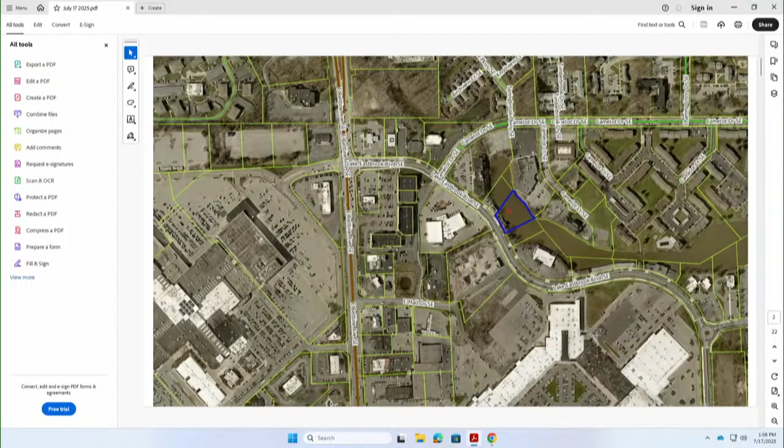The site is improved with a single-story structure and a parking lot. The building does not extend over Lake Eastbrook like the case we had in April, but it is within the waterfront setback. The back deck is proposed to be enclosed. While the deck is existing, the zoning ordinance treats decks and structures differently, so the setbacks are different, and this request is being brought to seek a variance for that setback because of the change from a deck to an enclosed space.

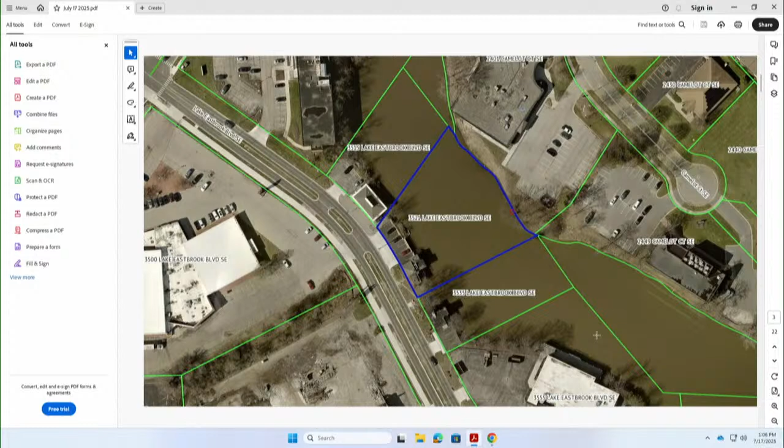The front entrance is proposed to expand slightly. As the structure is built at the front lot line, this requires a variance from the front yard setback. I've included a brief overview showing the deck, and that's the space that's proposed to be enclosed. The footprint of the deck is not proposed to be expanded; the enclosure will follow the same dimensions of the deck.

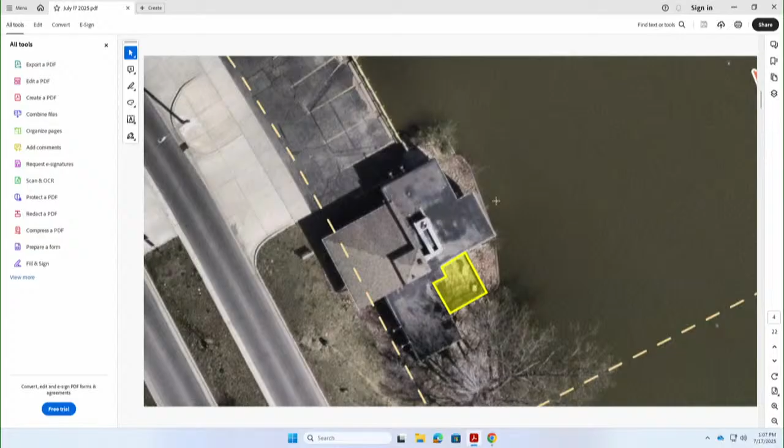On your screen, you'll see an image of the front entrance that is proposed to be slightly expanded. If you look at the roof line, you can see the expansion there on the right. It's proposed to be enclosed with a new door and concrete steps coming off the side. Again, because this building is built at the front lot line, that expansion requires a dimensional variance for the front yard setback.

With that, I will turn it over to Mr. Lewis for the report. There he is. Thanks, Rowan. So I visited the site yesterday around midday. It's a single-story commercial building.

The building appears to have been somewhat pieced together over the years. It's unclear when the last addition was made to it, but it seems like it's been decades. I think the pictures do the building justice. It's not in bad shape, but I'd call it tired, in need of a refresh. It's built to the front property line, so everything that would be done here would be in the setback.

It's pretty straightforward. What you see is what's really there in the pictures. We discussed the surrounding neighborhood a little bit on a case a couple weeks ago. The mall's right across the street with big box stores, and there's a number of these type of buildings all along Lake Eastbrook that are perched in about 27 feet of buildable area, where they've built out pretty much every square inch of that buildable area.

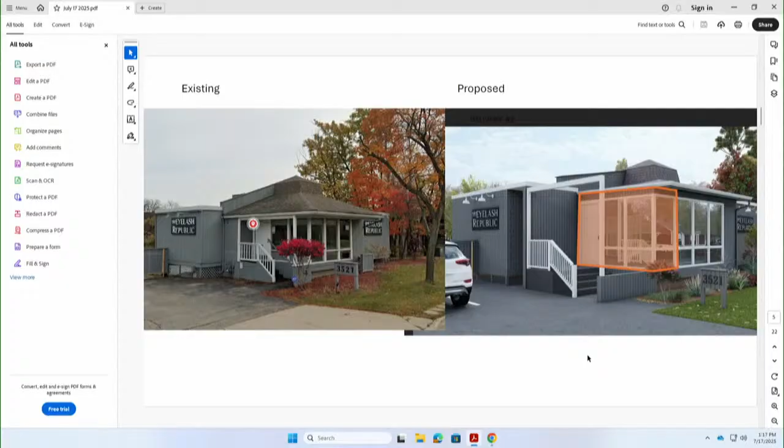But if they just wanted to put a canopy over it later because they want to keep rain off people's heads, is that fine? Yeah, a canopy would not require a variance. And I don't need to change anything. Yeah.

Okay, awesome. All right, well, we have a motion to approve. All those in favor? Aye. Opposed? Okay, good luck. All right, work with staff after today, and you can get going.

Yeah, thank you. All right, our next case is 1111 Second Street Northwest, Mr. Rowan.

The next case on the agenda is 1111 Second Street Northwest. The applicant is requesting a dimensional variance of 19.4 feet to reduce the required 20-foot rear setback to 0.6 feet, a dimensional variance of 11.4 feet to reduce the required combined side yard setback from 14 feet to 2.6 feet. The applicant is proposing to convert an existing secondary building to a primary structure for the purposes of 3 residential units.

The property is located on the northwest side of town, indicated here by the yellow star. The property is located just north of I-96, or 196, just off of 2nd Street, really close to the exit off 196.

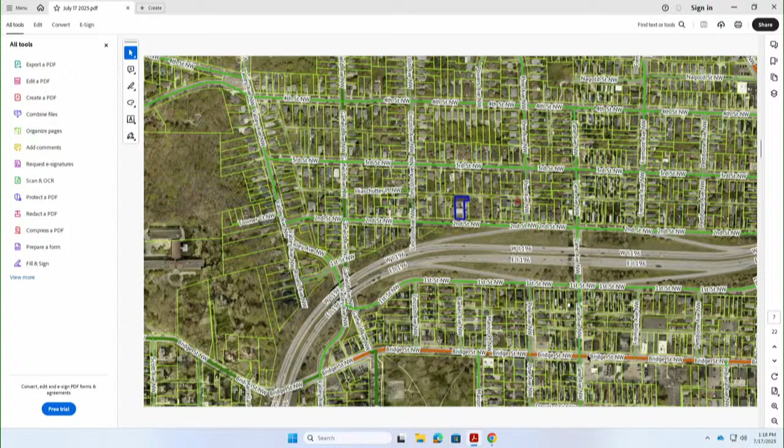On the screen, you'll see the property. There's an existing single-family home at the front of the property and then a secondary building at the rear of the property. The applicant is proposing converting that back building to 3 residential units, townhouse style. Because the building is currently used as an accessory building, there are different setback requirements for accessory buildings and primary buildings. Converting the building to residential will make it a primary building, kicking into those primary building setbacks, hence the request for the dimensional variances.

According to building department records, the back building was constructed in 1920 as a single-story garage. In 1926, an addition was made to the building to add a second story. The site currently does not meet green space requirements for a single-family property. Reclassifying the property from single-family to multifamily by adding those 3 units will bring the site into closer conformance with the green space standards, as the green space requirements for multifamily are lower than for single-family.

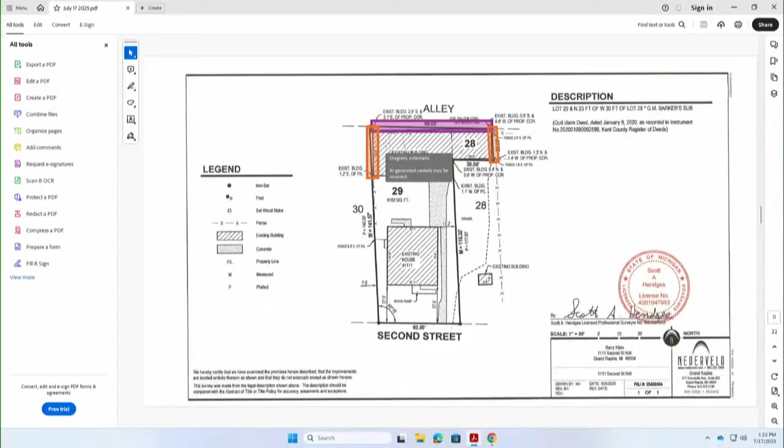Okay, perfect. Okay, and I will turn it over to Mr. Lewis again for the report. All right, yeah, I also visited this building yesterday, after the first building. It's a two-story brick building. Before I read the staff report, I wrote down it was built in the early 20th century, about 100 years ago, based on the brickwork and the shape of the windows, and I was pleased to be right.

At some point, they built a 3-foot CMU parapet on the front of the building and rebuilt the roof to single slope it to the back of the property. It's in poor upkeep. Most of the windows are boarded over. There's weed trees growing all around it. Ivy's grown on it. It's been graffitied a number of times on the backside. Brick is spalling in a number of places. It is in poor upkeep, and probably could get torn down if something substantial doesn't get renovated in it.

You can't really tell from any of the aerials, but there's substantial slope on the rear side of the lot along the alley, 6 to 8 feet of grade change going up. So from the bottom of the building to the kind of the middle two-thirds, around where the number 28 is on the screen, the grade slopes from north being the lowest to south being the highest along there. Just interesting. Most of the alley side windows have been infilled with CMU blocks, assumed to keep people out of it.

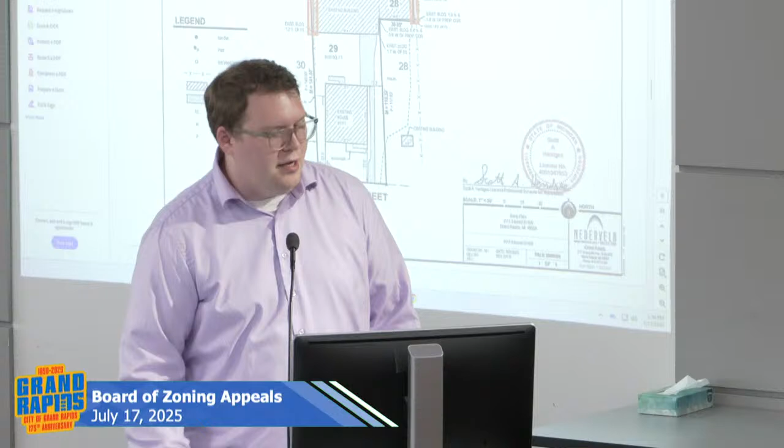So the condition of approval is really a function of trying to reduce the amount of variances that would be needed to support the conversion of this structure to a primary structure. Building code might also have some additional implications that I didn't initially discuss with them regarding that proximity to the property lines, and that's a conversation I would be happy to have with them.

It is our recommendation that there be a condition of approval for a combination of the two lots. And Rowan, to combine the lots is the plan of the applicant, and I believe he testified that. Correct, yeah - this was planned anyway, so it does not seem like it would be a hardship since it's actually something that's being requested.

So, Ms. Lockman, please correct me if I'm wrong, but you maybe have a concern that this condition would require one entity to purchase both lots, as opposed to potentially two different entities purchasing the lots? I just am sensitive to the issue about the requirement of the common ownership rule that requires a combination of non-conforming lots, and these are not non-conforming lots. I just am sensitive to requiring lot combination when it's not required. But I'm the only one who is concerned with that, so...

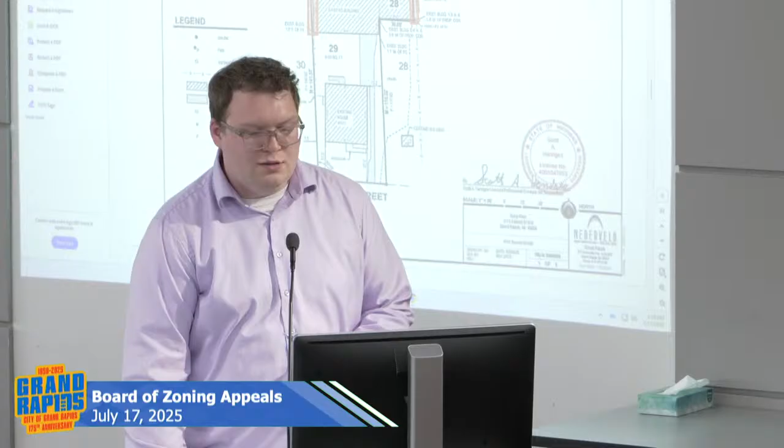Yeah, I mean, if the board wishes to amend the motion to account for those two additional variances, I'm happy to write those up very quickly. And I would be more concerned if we were imposing this on the applicant, but considering he testified that this was his plan, I think that we're simply granting the variance that he's requesting.

Okay, I'm just going to call the question as it stands and see where we go from there. Okay, all those in favor of the motion to approve with the combination of 1105 and 1111 Second Street - all those in favor? Aye. Opposed? Okay, we're good? You're good.

All right, work with staff after today and you'll be on your way. Okay, our next agenda item is 465 Fuller Northeast. Mr. Rowan? Yeah, thank you, Chair. The next case on the agenda is 465 Fuller Avenue Northeast. The following variances are being requested to provide privacy to an existing business.

The request is a dimensional variance of 40% visible light transmission, to reduce the required 70% visible light transmission to 30% visible light transmission. Visible light transmission is a measurement that determines how much light can pass through a pane of glass or another transparent surface. We essentially use it to determine visibility between the exterior and interior of a building. That's how our ordinance defines visible light transmission and why it exists.

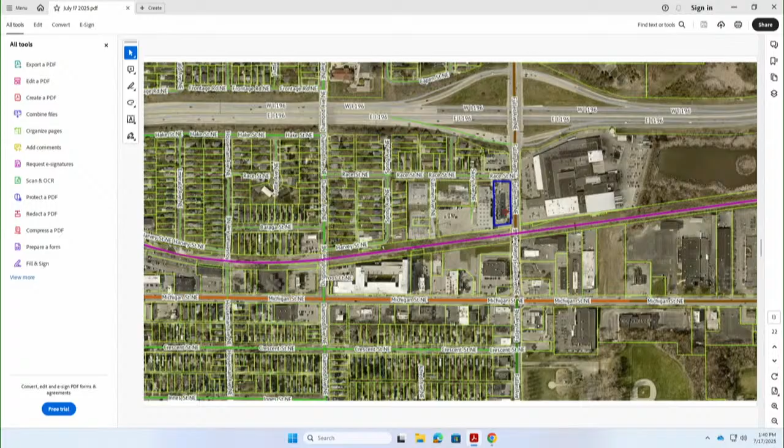The site is very unique for the area. It's got a lot of topography, and the building has 3 tenant spaces and a drive-through associated with it. The current applicant is occupying the northernmost tenant space on the site.

That tenant space was permitted with a building permit in 2023, and then a zoning compliance case about window film on the property is the action that the applicant is here today to ask for remedy from.

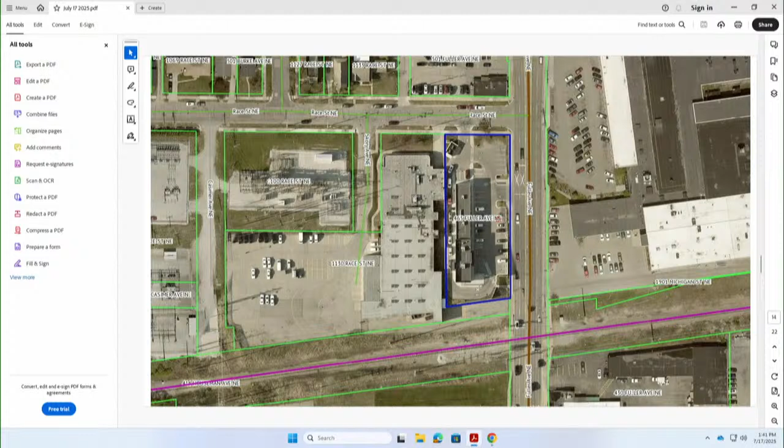The ordinance requirement is that all spaces counting towards transparency requirements maintain at least 70% or greater visible light transmission. Our director has written a determination based on industry standards that 68% or above meets the intention of 70%. So the plain text says 70%, but our director has an interpretation about 68% based on industry standards and just how glass is manufactured.

During the initial review of the tenant fit-out, planning staff flagged this business as requiring special land use for medical office in the TNTBA zone district. The architect for Biofuse Wellness, the applicant, stated that they are an infusion spa and not a medical use. Planning staff closed the issue and added a condition on the permit that the use shall not include procedures or therapies requiring medically trained personnel, and determined that this use is a beauty or spa service.

That discussion was required because medical uses on the ground floor are special land uses in this zone district, while beauty and spa services are permitted uses. So based on the information submitted by the applicant during the initial building permit, the official determination on this use is a beauty and spa service.

The applicant had a previous location at 1059 Wealthy Street Southeast. I included a photo of that location, and no window film was present there. The film was added after a building permit had been issued for the tenant fit-out, and the window film was not present on any of the plans.

A condition of that building permit was that there are no changes to exterior materials, glazing, openings to any site features, and interior treatment for all existing glazing shall be maintained in its current level of glass clarity and shall meet all transparency requirements of the Grand Rapids zoning ordinance. A condition on the original special land use approval of the entire site and building is that the requirements of section 5.2.14, building transparency, shall be met relative to transparency and VLT, and no reflective mirrored glass or spandrel glass should be used.

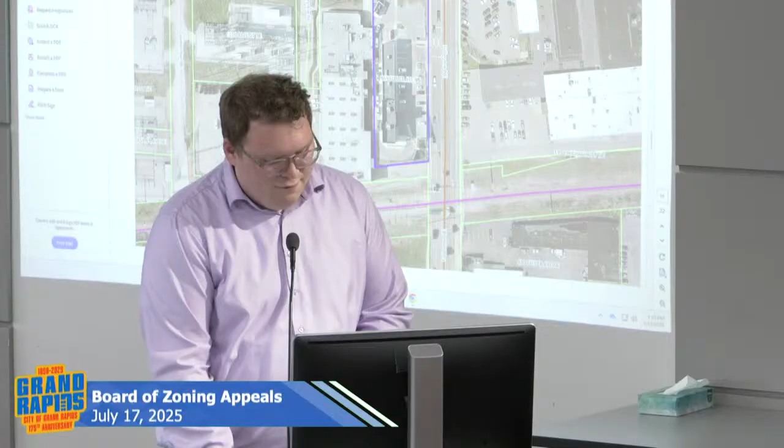The applicant did provide several examples of other properties in the area with window film or reduced transparency. I had a chance to look into all of those. The majority of those cases are potentially violations of the zoning ordinance as well. 1036 Fuller Avenue Northeast is legally non-conforming, and 425 Fuller Avenue Northeast, the Walgreens, I conducted a site visit of that location, and it appears to meet the 70% VLT. On the screen, you can see images of the window film that was added to the space.

And I will turn it over to Ms. Schaefer for her report. Thank you, Rowan.

So I visited 465 Fuller Avenue Northeast, also picked up a Starbucks, which is going to be relevant because in this building, there's a Starbucks, a Bros Donuts, and then Biofuse in the same building. For those of you who were on the board at the time, you may remember this variance - this was the old Burger King. We argued a lot about parking and traffic flows, and just want to say we were right. It's a difficult parking lot to navigate, but it's a very popular spot with Starbucks.

The Biofuse building, I reviewed the windows in the entire building. Starbucks and Bros Donuts both have windows you can see into from the sidewalk. Of course, with Biofuse, you cannot due to the film on the windows.

I also looked at the neighborhood, which includes a bar - I'm not going to say directions because I'm going to get them wrong. There's a bar a little bit of ways away to the north.

That appears to have some blinds on the windows, but doesn't appear to be non-conforming. Across the street is a manufacturing industrial facility. Down the street is an appliance store, a Walgreens, as well as a gas station, all which seem to be compliant with the window film. So I didn't see other businesses nearby that had similar ones.

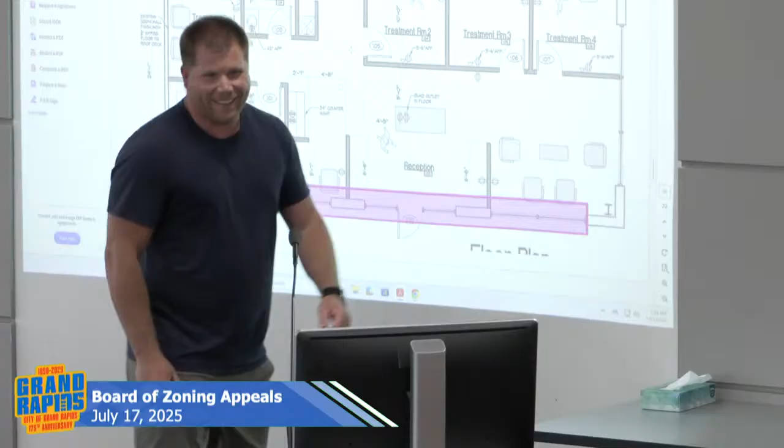I mean, you can see in this, we have an open seating space right in here, and then there's some... oh yeah, there you go. Well, you guys have it on your computer there. So they're entering through that front area? Yes, right, where there's all the traffic. Thank you.

Okay, Mr. Lewis? I have a question for Rowan, for Mr. Brady. In the modern commercial district, do we have these window transparency requirements, or what other districts require? So this section of our ordinance lives in Article 2, which isn't zone district specific. It applies to all building transparency requirements, so this would be the same standard across the entire city.

Thank you. I have a question of the applicant. I went by there, I walked the sidewalk, I walked around the building, and this diagram really helps because all I saw was a waiting area, except for your prep room on the left side of our diagram that we're seeing now. That seemed to have a little bit heavier of a coating on the windows. I could not see what was in that room.

So I'm wondering, is there really a need in a reception area for the film? And also around the corner where really there's very little, there's nobody there except for those that park over there, and the only people that would park over there are people coming to your establishment. You have the drive-through that comes around right to the corner.

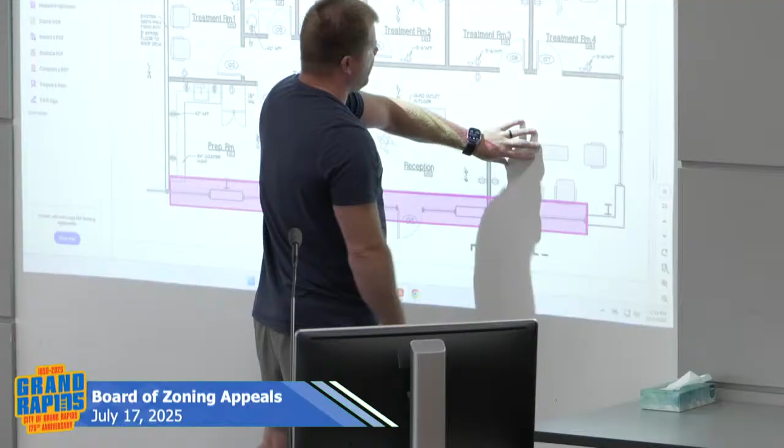Oh, right there? So again, this is the only reception area that you're talking about. This, we still have people that receive all the... waiting for different wellness solutions in an open space, or they have the options through private rooms. So these are the 2 windows that you see in the other image that are not covered, because that's literally our door and then the little 2 windows to the side.

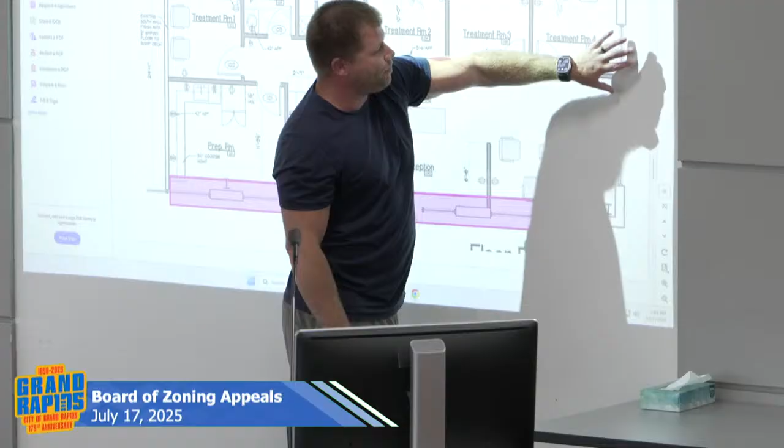So here is where you're talking about. The drive-through wraps around and comes here. Okay, this drive-through is, as you said, full all day long. Yeah, so that's partially too why we did the coverings on the side as well. This one in the prep room is darker, because that's where we do a lot of all of our mixing and everything. And so that is, we did that to prevent any visibility inside of there.

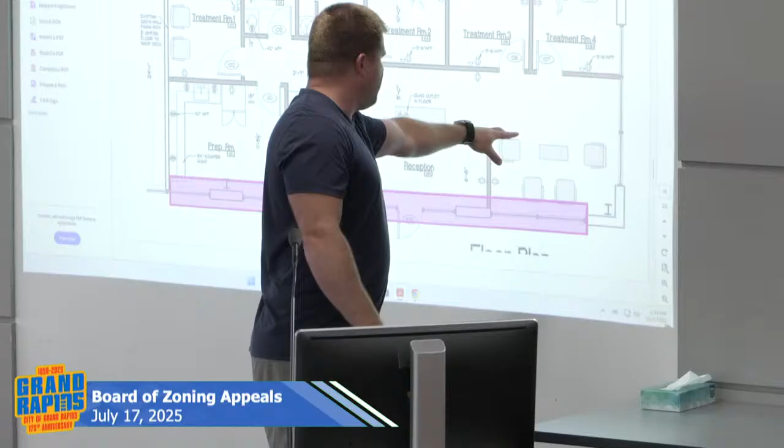And so, I mean, we're willing to obviously reach some kind of solution here. We just need to also provide privacy for our customer base. I get that. Explain to me the ones with the couches in the other corner, this bottom corner? Yes, so this is just an open seating area. So like a waiting area? No, I mean, we do a lot of IV infusions, and so you could sit right there and get an IV infusion. Okay, or you could choose to be in a private room.

Okay, Mr. Brady, sorry, ask a question. There seemed to be, if you can go back, I think a screen, there's a bar there in the windows.

Okay, so they're kind of split. I'm assuming the top part is not screened. Above the bar at the top, this white part here. I don't know, I may be wrong. Maybe it's a full sheet on the whole window.

But I guess what I'm wondering is, is there a way to get him where he needs to be by removing some of the bottom and some of the top, so that he still has some privacy for his people?

Our ordinance requires that glass devoted to meeting transparency requirements has to meet that 70% requirement. In this zone district, it's 60%. So if the applicant was to use the covering on 40% or less of the windows, I believe that would be in compliance with the zoning ordinance. So essentially, less than 40% coverage of the entire building facade would meet the requirements of our zoning ordinance.

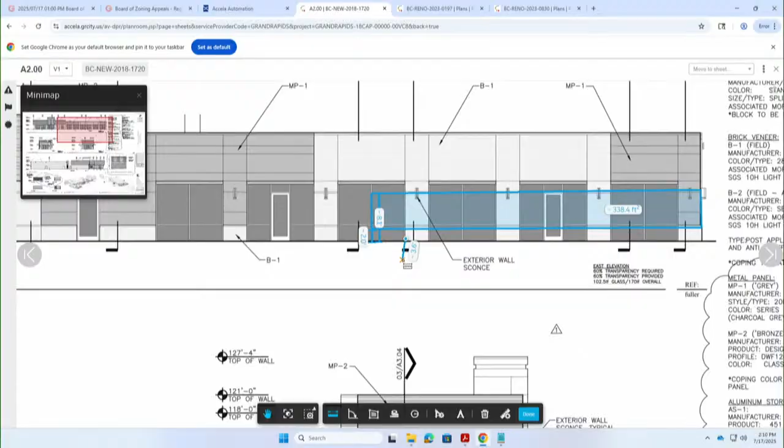So what you're saying is if he does not get a variance, you could work with him on getting him in compliance. Yes, it would probably require removing a good portion of the window film in that middle space.

Comparably, I could throw a 30% window tint on all the windows and that would meet code. Yeah, you could go down to 70%, 68% VLT.

Rowan, do we have a Board of Zoning Appeals meeting next month? Yes. Do you think it would be wise to table this until next month, work with the applicant looking at solutions, and then bring it back to the board? Potentially, I would leave that up to the board to see if they want to make a motion.

All right, ready to make a motion? One of the other things I can't help but come back to...

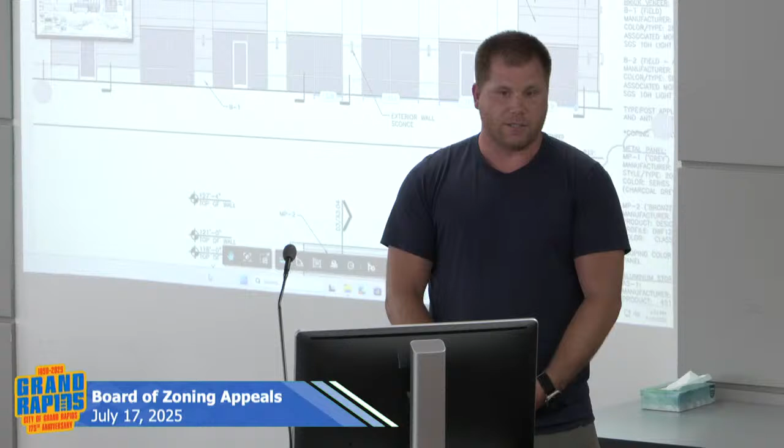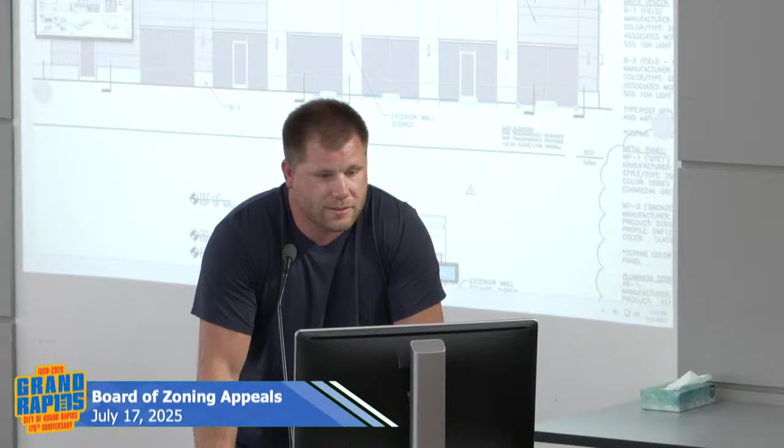There aren't any trees, it is very, very sunny, and we're a very unique use case as well. Our whole industry is very up and coming and very new, providing these types of retail services. It's different than any other industry—we're not just a donut shop, we're not providing, to your point you brought up earlier, full-on medical services. It's totally a med spa kind of world, so it doesn't fully conform to everything else in a sense. There's probably going to be some changes coming with that throughout the country. But again, it's a different use case compared to being a donut shop, a Starbucks, or a Walgreens. Blood centers and stuff like that have full blackout windows for some of that privacy component as well. So places that need privacy get privacy. That's kind of a specific use case.

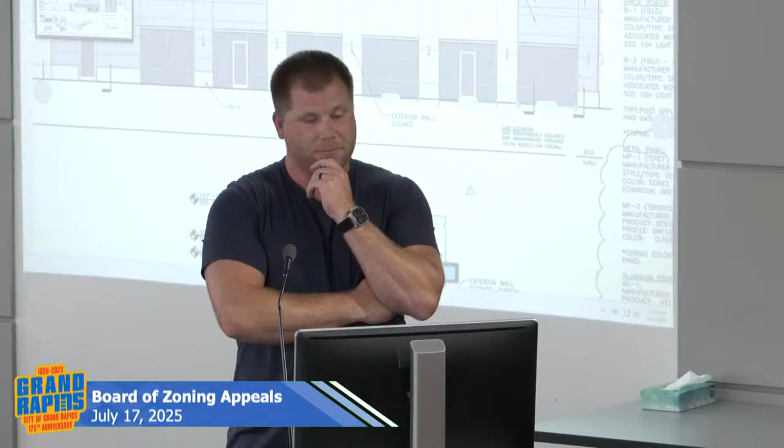I didn't even think this was going to be an issue. I think where we're struggling is, if the code can be met in a different fashion, we're not supposed to grant a variance. So that's where I was struggling, as to whether or not this was even possible.

I'm going to make a motion to close. Let's get public comment closed. Oh, sorry, that's okay—I didn't see anybody else in the room. I presume you're here for the other one. Do you want to talk to us about this? No? Okay, I guess I have one other question for planning. Is it to me or to planning?

Planning—at some point, was window transparency an administrative departure? Because I swear I applied for an administrative departure on Van Andel.

Administrative departure—that's something the applicant and I briefly talked about. There are administrative departure standards, like there are standards for the variance request. I didn't feel like one of the standards could be met, which was neighborhood character compatibility.

Can you just expand on why? Yep, it was a couple factors. One, this is a TNTBA zone district, and I was thinking about how this decision would potentially impact other requests in the TNTBA district. I didn't feel like this transparency and the deviation from the VLT request—that administrative departure—would potentially impair planning's decisions for other similar requests in TNTBA. I think the building, with its transparency, the conditions of approval tied to not only the building permit fit out that had the condition about VLT maintenance, and the original special land use approval for this building as well—I didn't feel like it was in my authority, based on those prior approvals, to meet that requirement about district neighborhood compatibility to approve the administrative departure.

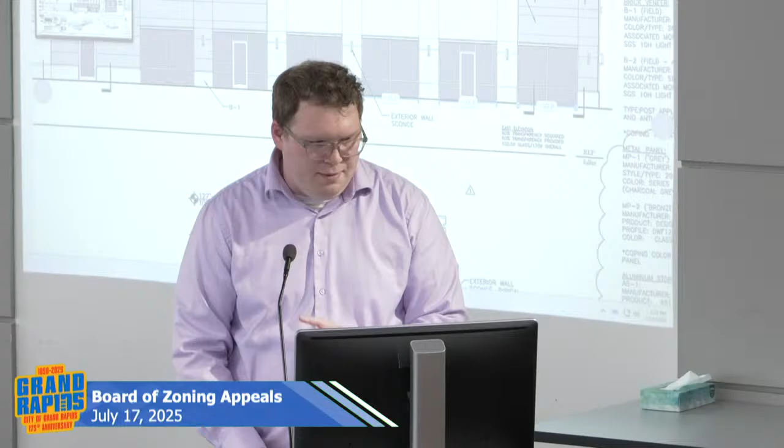I didn't get the impression that this wasn't retail. My understanding is it's a personal service, a med spa, or that's the applicant's definition—a beauty spa service under our ordinance. But they typically have product to sell, so I didn't understand that just because there were services being provided, there wasn't also retail happening. It would likely fall under our definition—I'm pulling up our ordinance to confirm, but personal service and retail is a different use category.

Oops, yeah, I did not mean to confuse things. I was just referring to retail as just a business in that district. And I guess maybe that's where I was thinking—I hear your concern about, hey, he saw it, he should have known. My thought was, hey, thanks for going in, because that otherwise likely would sit vacant, because of how that other tenant is really just dominating the entire area.

Yeah, and I don't disagree with that. In terms of the impact Starbucks has there and the traffic flows, I remember discussing the drive-through for quite a long time when we even approved this building. That being said, in terms of setting precedents, if this is not self-created—in terms of it being leased in this condition, he knew what his business was, he knew they would want privacy to provide this service, and then he put up the film that is not in compliance with zoning.

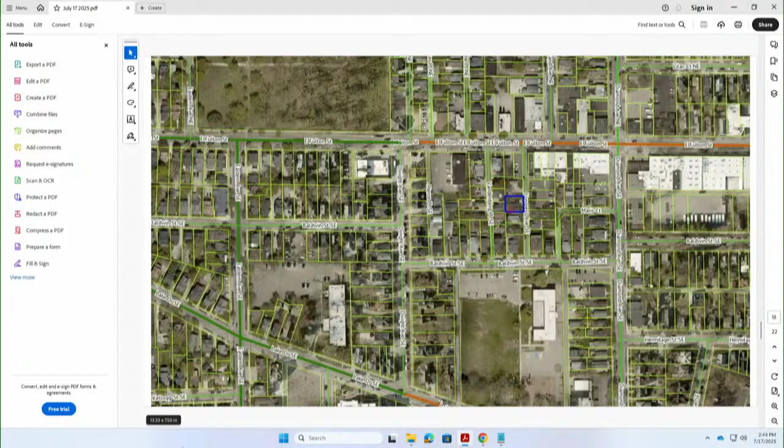The site plan attached to the packet does show a rear yard setback of 20 feet. The requirement of the zone district is 25 feet, so we have a departure of 5 feet, and I communicated to the applicant that's something staff would be able to offer. There was a little bit of miscommunication between the applicant and myself. The ordinance definition of rear yard setback is 25 feet, but staff would be able to permit down to 20. I wrote the variance request at 25 just to avoid any unnecessary confusion with that administrative departure.

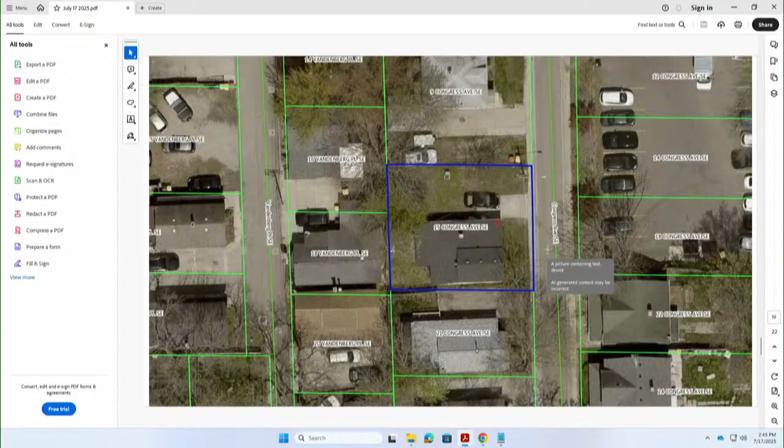Additionally, there is a requirement for a required building line for the front of the structure to be placed at 27 feet back from the curb line. There is another departure available for 10 feet, so staff was able to reduce that required building line down to 17 feet to get the building as close to the front lot line and out of the required rear yard as possible. So the required building line for the front of the structure is 17 feet from the back of the curb.

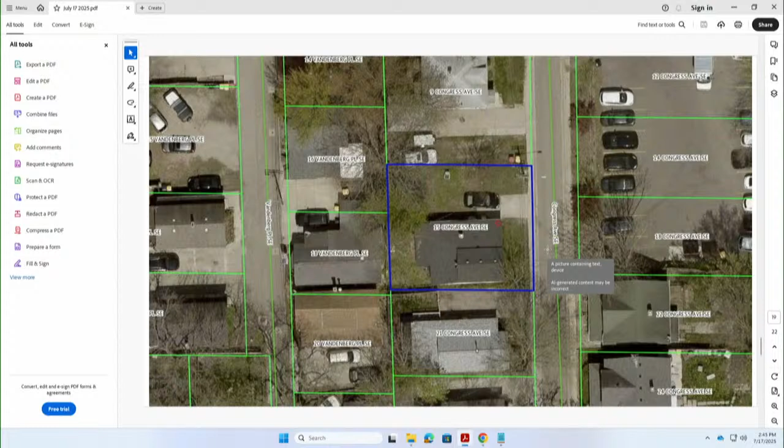Despite that administrative departure, the proposed structure still encroaches into the rear yard setback. The existing structure is 11 feet from the rear lot line. The applicant has stated to staff that the structure is intended to accommodate aging in place and necessitates single-level living. The floor plan shows a bedroom at the front wall, which the applicant stated is the reason for the reduced transparency on the front wall.

And I will turn it over to Ms. Schaefer for her report. Thank you so much.

So I had the privilege of looking at 15 Congress Ave Southeast, as noted by Rowan. It's a very narrow side street, a one-way street off the main road, and there are predominantly single-family houses immediately surrounding it, although there is a parking lot across the street and a multifamily home up to the corner. It's a much older, very compact neighborhood. I'm pretty sure the house across the street is basically built on the sidewalk. There's not a lot of space, unfortunately, between all of the houses.

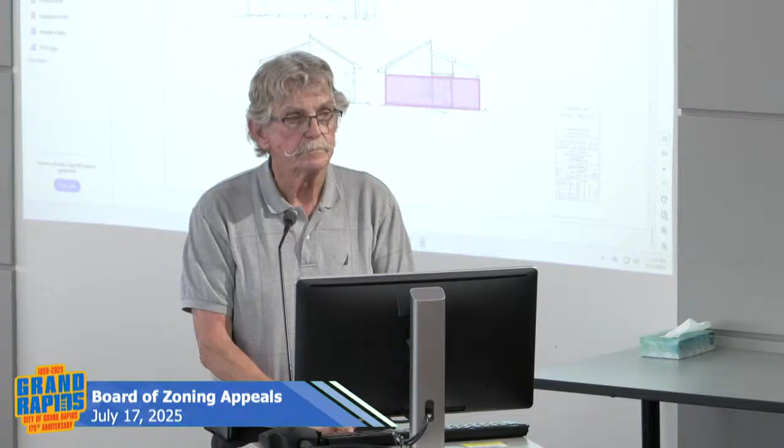But isn't it 6 feet? Yes. So if you were 6 feet away, wouldn't you be within the 5-foot setback? Yes, so it's not prohibited. My understanding is that the carport is currently 8 feet away from the house. It could be 6 feet away from the house. If it was 6 feet away from the house, that would mean you're 5 feet off the side.

And I'm trying to create green space between the carport driveway and the house. Yes, but you said you had to have the carport further away, but you don't have to. The carport could be 2 feet closer to the house. Could be, yes. And then you would not need the variance for the side setback.

5 feet for the accessory building? 5 feet, you would have to meet the 5-foot side setback. And if the carport was 2 feet closer to the house, which you'd be permitted to do, then you would not need the variance for the side setback to be 3 feet instead of 5 feet, right? Yes, your thinking is correct. Does that help?

Okay, is there any other questions? I'm trying to look at a couple of different diagrams and figure out, there seems to be a bump. Can you go over the diagram, the layout?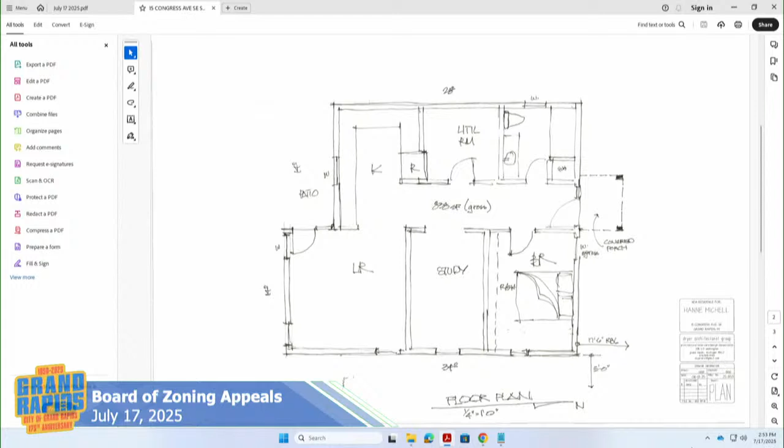Can you pull up the diagram that shows the different setback requests? Yes, excuse me. This one, Mr. Lewis? Yeah, that's the one. Okay, and so on that drawing, you can get to a 20-foot setback administratively, but that bump into the rear yard, the 20-foot is, Mr. Lewis would be referring to the living room.

So the 6 foot into the back, what's the problem? Mr. Dryer, the board is asking you about this space here. Why is that needed? Just to make the living room large enough to live in, excuse me.

My doctor's calling me.

She does have 5 grandchildren, and she does anticipate the grandchildren coming and being with her, not living with her, but being there at times. So it's nice to have a living room that's usable.

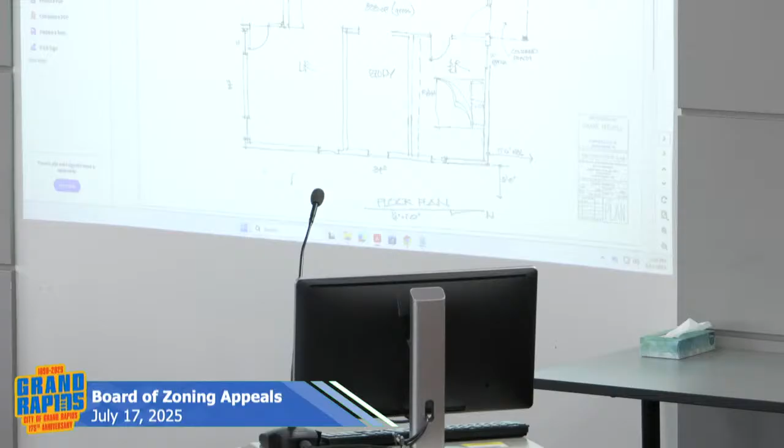So the front entry canopy, that's not in the request. It's the bump in the back and it's the carport. Correct. Okay, yes, and the living room, inside wall to inside wall, is about 13 by 13. Oh, and the window transparency in the front, those are 3 separate requests, essentially.

I had a question about the dimensions in the 1928 application review. It mentioned the lot was 36 by 66, but then I thought I saw someplace else in the record, on the application, it says the lot size is 53 by 62. Yeah, the 53 by 62 is what I measured based on the Kent County parcel map.

So it's possible the lot has changed shape since the 20s, or it was the 20s and they may not have had a long enough measuring tape.

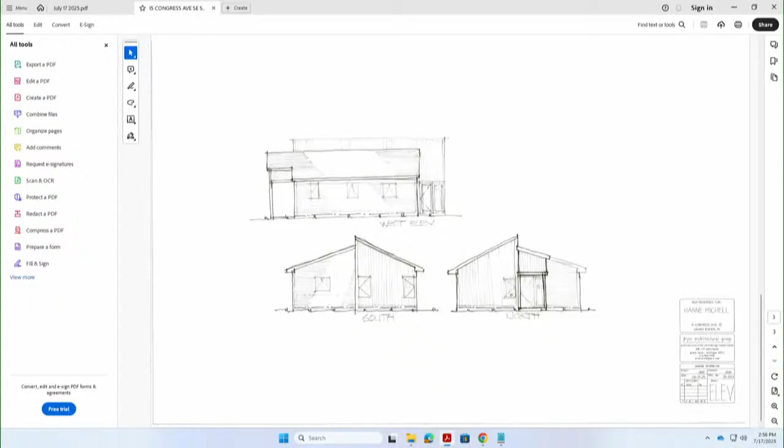Keep in mind that in those days, they were measuring with chains and rods. Very different. Okay, I have a question in regards to the transparency.

So the front, your reasoning was because there's a bathroom in the front, that's why you would not have the window? Is that correct? So that's facing north, that would be west? Yes, the bathroom is in the right-hand corner, and that faces the front, Congress, correct?

Yes. So you could feasibly flip the bathroom into the utility room, put the utility room up front, and then put a window in there, right? And that might save a little money, because then all your plumbing's together.

Sorry, I tried to do that, and she doesn't want the bathroom, she wants the utility room next to the kitchen. But there is a solution to get the window and the transparency.

And we can't, with the way the house sits, with the front setback, how much room do they have to go forward? I'm looking at all the other houses in the neighborhood that are almost on the sidewalk.

It's an excellent thought. So the way our ordinance is written, we have a required building line, which is the required distance a structure must be built at relative to the street. It's not a setback, it's a build-to line. Our ordinance requires that we measure all of the houses in proximity to determine that required building line. Where that measurement comes out less than the ordinance says, we default to the ordinance. The ordinance says 27 feet from the back of the curb line.

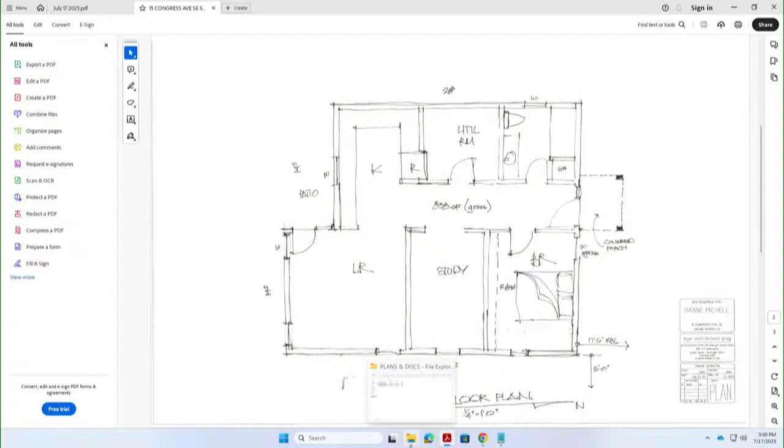Just so I understand the question you were asking - is it that the build-to line would normally be where the current existing front part of that footprint is, or that 6x6 entry canopy? A build-to line would apply to the front of the structure. Things like porches and canopies can extend out further from that build-to line.

I thought the required building line concept was, you've got a wall of buildings, therefore you want your building to line up with that wall of buildings, right? But what I'm hearing you say is, I've got a wall of buildings and I've got to move this thing further back from it. I don't think that's - I can pull up the ordinance section where it says...

Well, yeah, I agree. While Rowan is doing that, I do just want to note that the houses on that road are all built at varying degrees from the sidewalk. There's no uniformity to be had in this neighborhood. So I made the comment about being on the sidewalk because it was just very notable, but it's not that all the houses are built right to that same part on that road.

And of course, directly across the street is a parking lot, so it's hard to compare, but I thought a lot of them were closer to the road than not. I mean, definitely closer, but just not on the sidewalk. I just didn't want to overstate it.

That comment shouldn't be taken as if they were all in line, when that isn't the case in that neighborhood. There are varying historical setbacks, is how I will put it. A lot of very old homes were built when the ordinances weren't in place.

It's based on this language here: for all residential dwellings on all lots, the required building line shall be equal to or the median of the front setbacks of existing main buildings on the same block. For the purpose of this calculation, the same block is defined as both block faces in the same zone district, not to exceed 5 lots on each side of the subject parcel and 5 lots across the street.

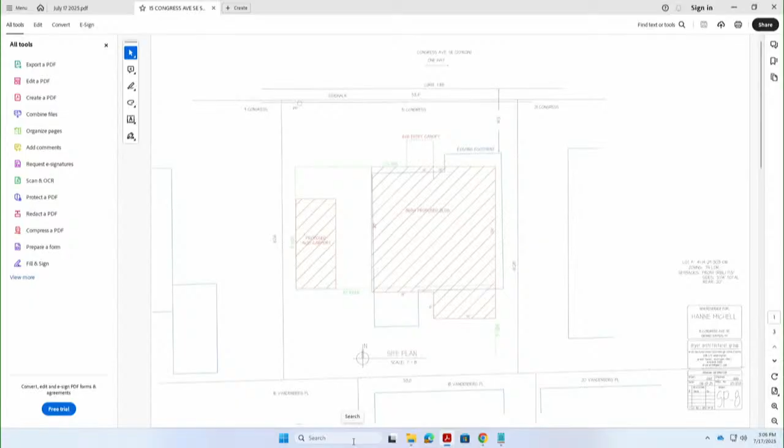Yeah, Ms. Stockman, correct me if I'm wrong, but I think you're getting at the loss of nonconformities. When is that triggered? Okay, so our ordinance says that when a structure is destroyed by an extent 75% or more of its replacement cost, exclusive of the foundation, then it must conform with all requirements. So if everything but the foundation is destroyed by 75% or more of its replacement cost, then it must conform with the ordinance.

So, but essentially, then, if the owner just removed the roof, went down to the studs inside, no variance would be needed. Likely, potentially, yeah.

The question about the foundation got me thinking, are you using any of the existing foundation to build? No, you're starting from scratch. I could not find a footing with a prod. If I was an architect, I'd know what that meant, but everybody seems to think that's a bad idea, so okay, I'll go with it.

Any other questions? No? Yeah, I guess, would you design it this is how she wants it, right? Are there other options or configurations, like if we gave you more flexibility, like drew a box and said you can build within this box, would you think about it differently, or is this really kind of what you guys want?